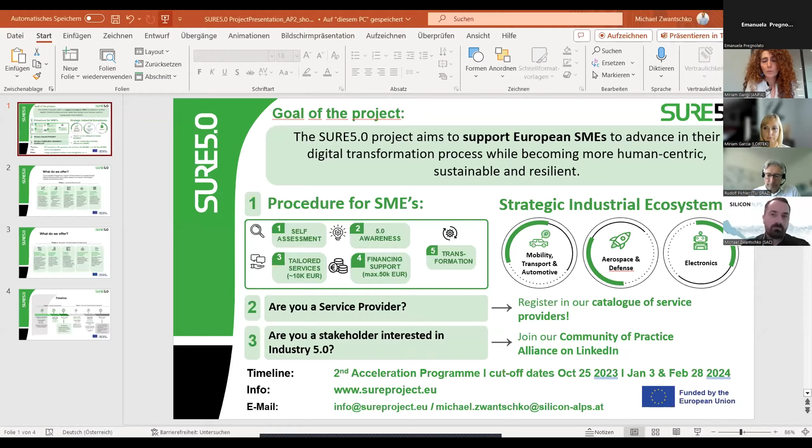Yes, good morning also from my side. My name is Michael Zwantschko from Silicon Alps cluster. We are a semiconductor and microelectronic cluster in the southern part of Austria, and we are part of the SURE consortium. I just want to give you a brief introduction about our project.

SURE 5.0, the goal of the project is to support European SMEs in their digital transformation process to become more human-centric, sustainable, and resilient. The overall topic is Industry 5.0, which is a topic strongly pushed also by the European Union, and it aims to introduce the topics of human centricity, sustainability, and resilience in manufacturing processes.

So how you can participate and what is the goal of the project and what are your benefits of it. First of all, European manufacturing SMEs active in those three strategic industrial ecosystems are able to participate in the project. If you are an SME working in those three sectors, mobility, transport, automotive, or aerospace and defense, or electronics, then you have the chance to be part of the project.

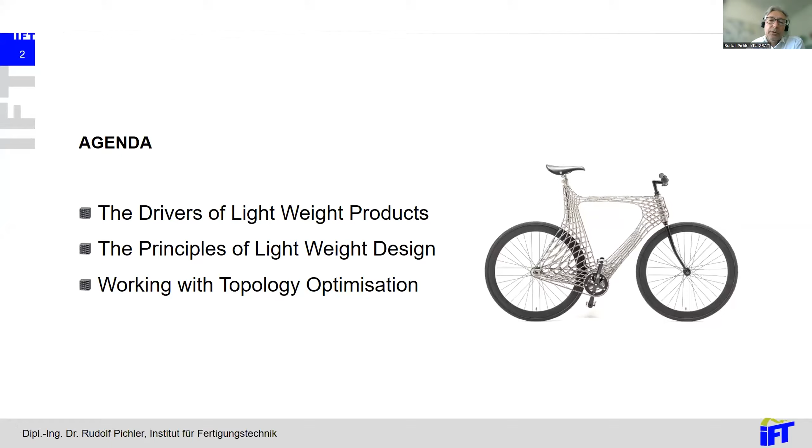Simply said, what are the drivers of lightweight products? It should be quite evident and simple. Then I will talk about the principles of lightweight design. And last but not least, I will go in a short way into the so-called topology optimization. This is a way how we can easily come to such products or such designs. If there are important questions, you're invited to interrupt me immediately, and I will try to give you a good answer.

As a first slide, I want to give you an introduction, and it's quite evident, I think 3D printing is definitely a future issue, yes. Lightweight design is driven by various branches, and it's not really a surprise that it's driven. If we look at the development going even up to 2026, as we got from the 3D printing trend report 2022, we see a rocketing development of these activities, and this is not only metal 3D printing, it's of course plastic, ceramics, other materials - nearly all materials that are actually used for doing 3D printing.

And the branches who are really the drivers, and who put a lot of money into it, are of course aerospace and also defense, military use, of course, once more the aircraft industry, also medical and dental industry, automotive industry, and many others.

Yes, and why is this a fact? It's no surprise. If we have products and components with less weight in comparison to former products, we have less fuel consumption, less environmental pollution, and what is also very important, we have less running costs.

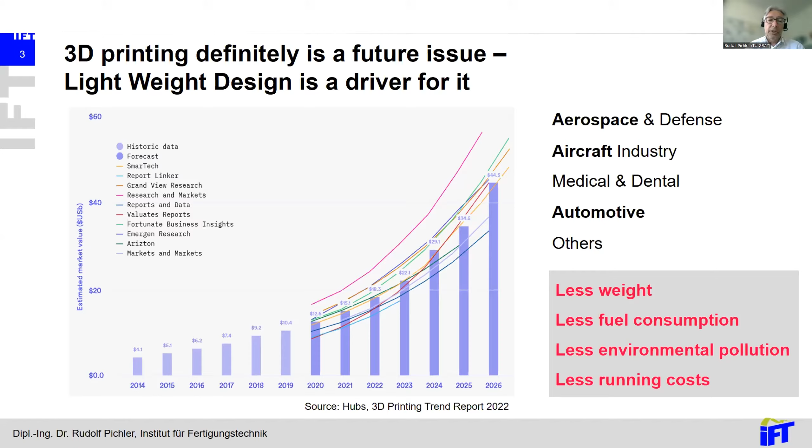So 3D printing has a lot of advantages, and it simply means we can design products that in former days were not possible. Nowadays, products with lightweight design can even be producible.

I'll give you a simple example. If we've got a hydraulic block, for years and decades it has been made and produced like this. In a hydraulic block you need to create channels—you have the feeds in and the feeds out, and it wasn't producible in a different way than this. You have a lot of material you don't really need, but it's very expensive to chip it off as well. So the final stage of this product was still like a cheese-looking part, and it was a heavy part.

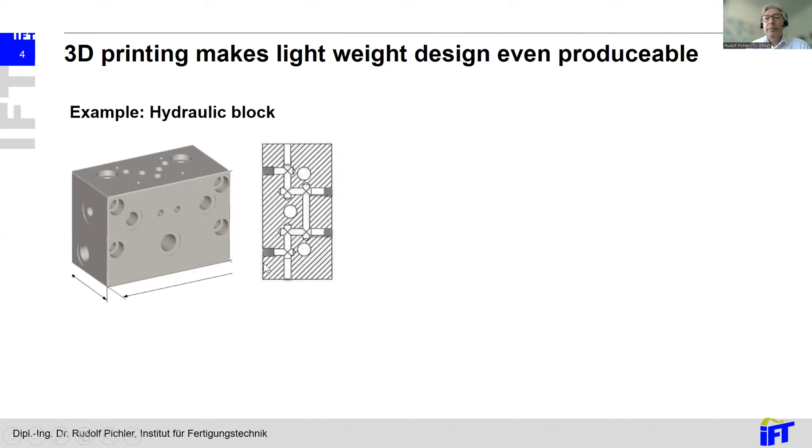With the means of additive manufacturing, it's now possible to have the same part with the same function in a quite different way. You can do it on the downside like this—you still have a frame maybe for stiffness, but you already have hollow sections that can be produced, cut out very easily. Or even in a better form, you end up with this design. Compare: in former days it looked like this, and nowadays it's possible to reduce the product to its very functions. In this case, we can have a good balance showing weight reduction of 80%. This is quite a lot.

Not only is lightweight an advantage, but the way of streaming fluids through these channels with rectangular bows and bends causes pressure losses. If we design it with a more streamlined design, we can reduce the pressure losses by 50% as well. Other benefits can also be created—you could apply cooling fins, special interfaces for sensors, and much more. So the advantage is really very high.

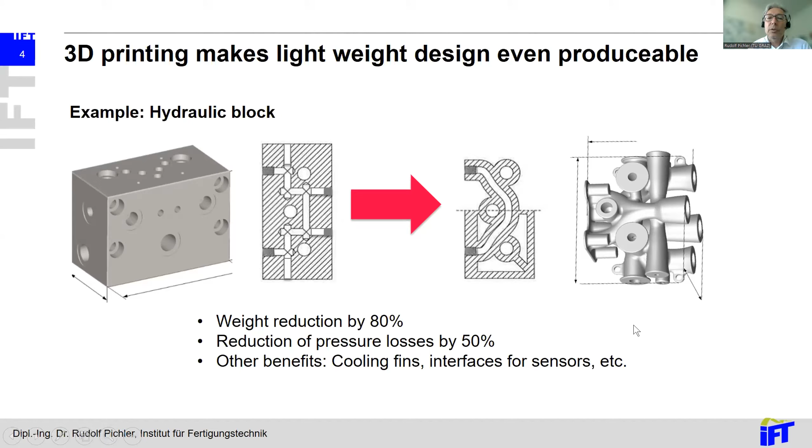The steady question is—here's another example from the aircraft industry. This is a bracket from former days with a weight of 918 grams. With additive manufacturing design and the technology to manufacture it, you can come down by, in this case, 64%. This is also quite a lot.

The question coming up, of course, is: wonderful, from the former design, the blue column, we could come down in weight by two thirds, like you can see in the numbers here. But what about the mechanical properties? This is quite an issue. But here too, if it's made really carefully, you can keep up the necessary stiffness, even maximum bolt force. For this case, the stress is a little bit lower than half. But you can optimize, and maybe you don't come down with weight as much, but you get some advantages in the maximum stress if you need it.

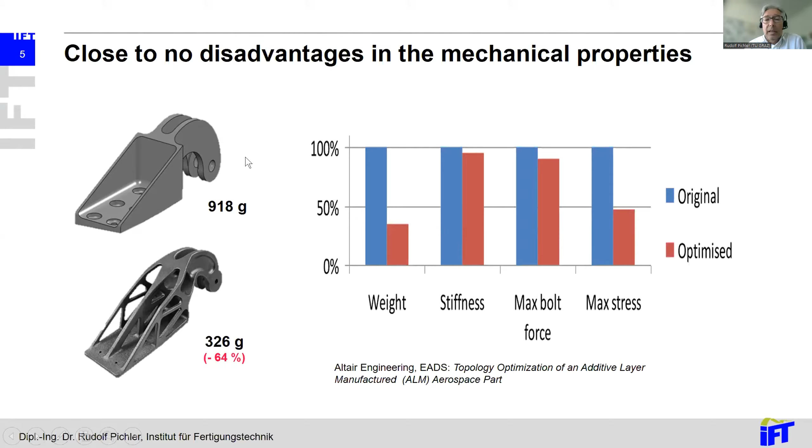Overall, you can say that with a really good design—and we will come to topology optimization later on—you can optimize and create the necessary stiffness or mechanical properties, as you had in the former design. So there is no excuse not to use and work with additive manufacturing for creating lightweight design.

I'll point out some construction principles for doing lightweight design in the next slide, and these are only three. My first proposition, my suggestion, would be for the constructors, for the engineers: please forget the right angle. Why was the right angle so important in construction? Remember the hydraulic block—it's simply due to the machine tools we still have.

Nowadays, we've got even better machines with more opportunities and possibilities, but most machines are still built up like this. You can drive your tools only in the X, Y, Z direction, and this leads to rectangular constructions. But for a new product, it's possible to leave the right angle, and you really could do what you like. This is my special suggestion.

Please draw the things like you want. We call this additive thinking. Additive thinking is losing the thinking of right angles, do it as you need it and not more. Put and use material only where you use it.

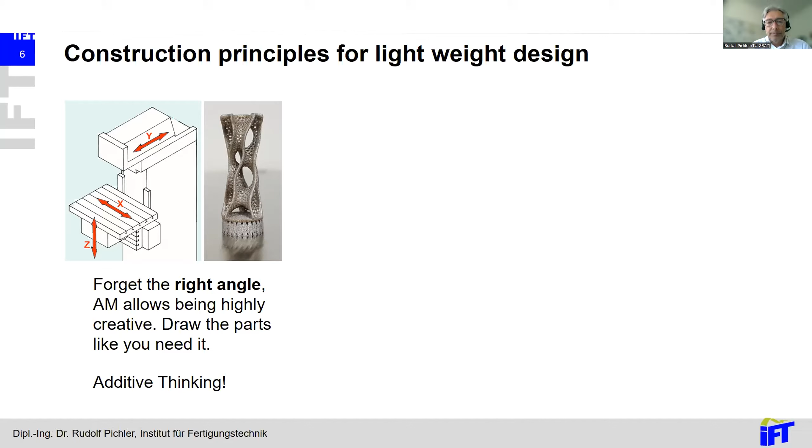So the next example is how to come to lightweight design. Mostly you work with full material, but full material doesn't have a need for the part in every area, because the flow of forces does not need, maybe, some inner metal work and build up. With additive manufacturing, it's now possible to work with so-called mesh structures.

As you can see here, this is a lever, and this is the side part of the seat of an airplane. With mesh structures, you get the necessary stiffness, and by using the air and the holes in it, you come down with weight.

Now one hint: don't fear that you have to construct these single connections. This is not necessary. When you work with software, you have tools that propose different forms of meshes. You just mark the outer borders, for example, and then press the button with the command to fill out with a certain mesh, type A, type B, type C. This is already a wonderful add-on tool in the software.

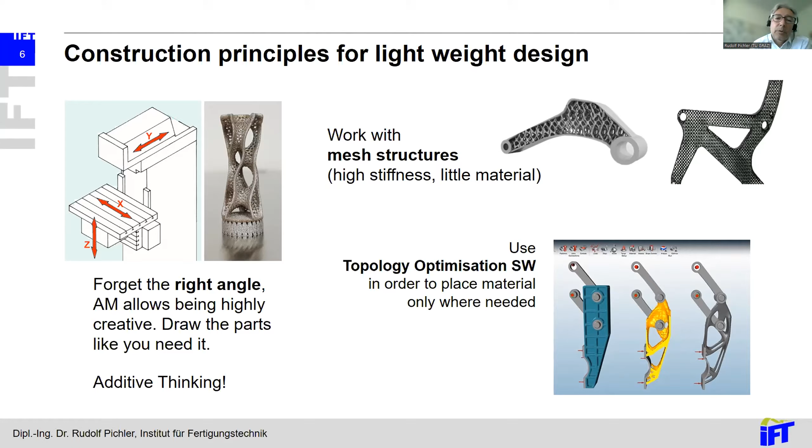So last but not least, it's only three. Of course in real life there are much more possibilities, but I want to keep it simple and give you an overview. What I suggest for coming to lightweight design is to use topology optimization, and of course you have to work with software. This is a first example and draft. What is the original part and what is the end part? I will show you, since I assume you are not acquainted with topology optimization so far. I'll give you a brief example.

Oh, there's one more example supporting the idea with mesh structures, really to come down with weight tremendously. This is a motor block with 5.1 kilograms.

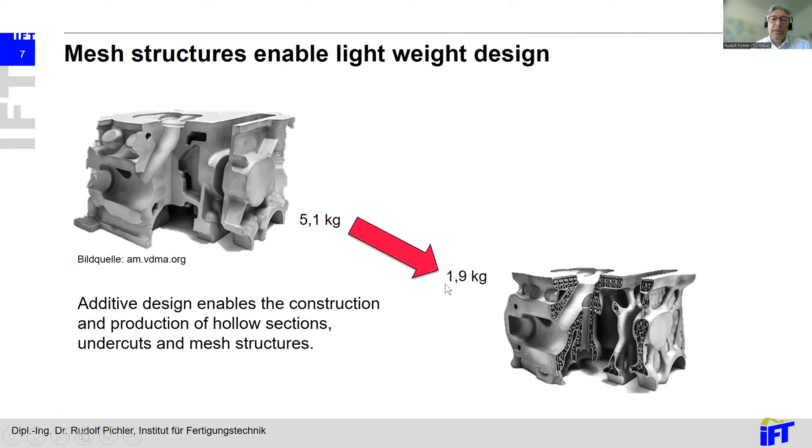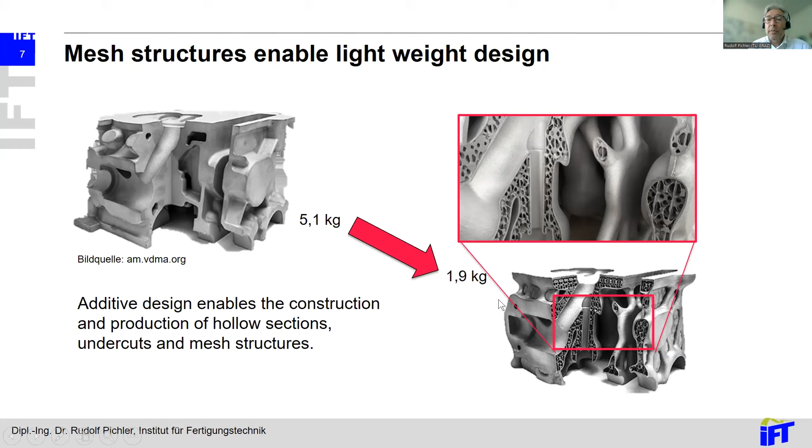And as we remember, additive manufacturing and additive design allow the construction engineer to work with hollow sections, undercuts, and mesh structures. The result for this motor block is you come down even to 1.9 kilograms, and this is due to, if I go inside and show a detail, the mesh structures, where in former times there was full material. This is a tremendous step down, and the mechanical properties, stiffness and strength, must of course be the same, otherwise this part would be useless.

So now I want to give you a short introduction to how topology optimization works. Let's create a model bridge, not a bridge for real life, because the dimensions would be too high, but maybe for your playground or your small play trains. Let's build a small bridge with a dimension not longer than 10 centimeters, as an example.

What is the first step? For this, of course, you use topology optimization. You cannot do it manually. Then you set, this is the blue dotted line here, the 3D design area. In X, Y, Z, you say the maximum extent this bridge could have is dimension A, B, C, or X, Y, Z. Here I only have a 2D design and a sketch.

The next thing is, yeah, more or less we have to build a bridge. I simply set a bar just to know where these forces fly around. You do not really draw this bar, but only at some position within this blue frame, you put the reaction forces. As we know, with a bridge we have a fixed support, like here in two dimensions, even three dimensions. Of course you have a second support force, and you also have torques to regard.

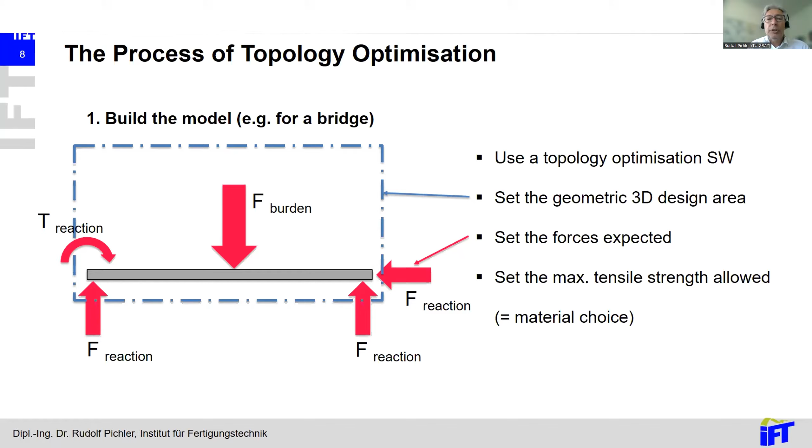And depending on the material choice, you have to obtain a maximum of forces. So this is the beginning, and then simply said, you press the button in this software, and there's a calculation done. There's a lot of equations, thousands of equations, and then there's an optimization done.

And the output will be, please look at item 2 here, you get a first draft out of the program. And this draft looks like this. It's a little bit crazy and strange, because sometimes you have interruptions, there's no material. But this is the consequence and the result out of the calculations.

And then the engineer comes back again and does some adaptations, and he or she can reinforce the dimensions of the principal geometries. The most important output of such a topology optimization is the allocation of where forces sooner or later should flow.

So you develop from this here, not even being producible, to this here, and in a third step you're doing some smoothing, because what you can see here, there's a lot of notches, and it's not really smooth. And as we know, as mechanical engineers, this is the beginning of a crack and is not allowed. So with manual rework, and also with use of the tools of the software, you can smoothen this principal geometry.

The more you go into FEM calculations, before you really refine it, but this is more or less the result and the way, very roughly, how you come to a topology optimized part, in this case a bridge.

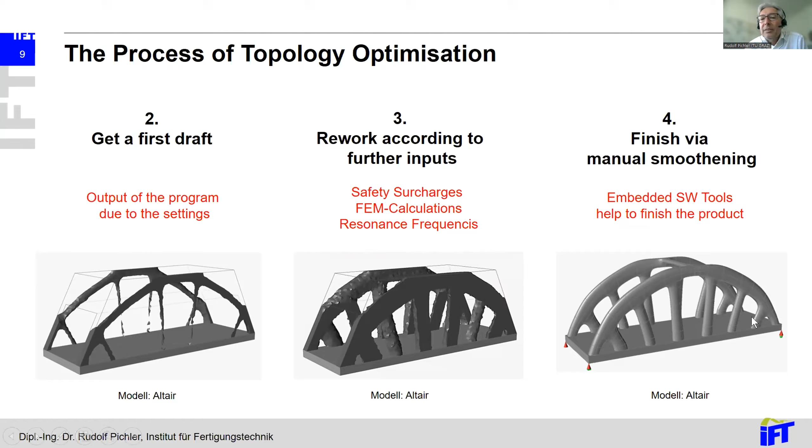I give you some examples from aerospace as well. In former times it was like this. There's a lot of metal sheets that were welded together. You created some stiffness via additional metal sheets, and you can think that this is quite heavy, and via topology optimization you end up in such a design.

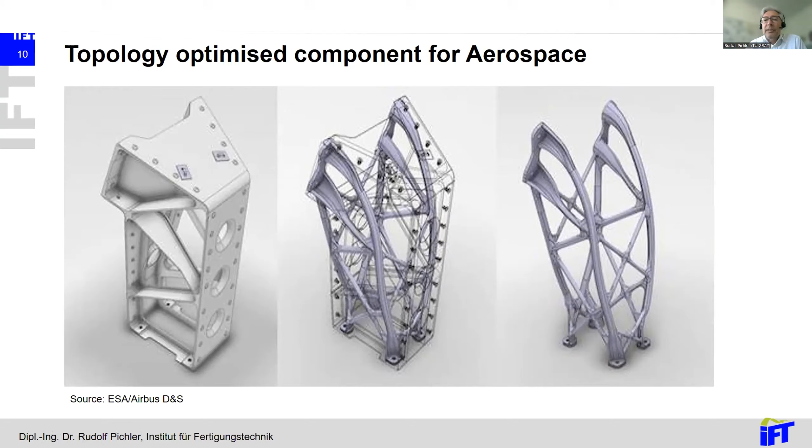It's quite wonderful, because all these designs are very close to what nature is doing. If you watch, for example, the structure of a leaf, you can find quite similar designs. So this is one example.

One more example, this is also what we did in our small factory. For example, gripper fingers for robots. You need any weight reduction, and you simply do it via topology optimization.

This also we did at our institute. It is part of a lightweight robot arm. In former times it was a simple tube, and this topology optimization, the result of this was this really. It's really design, it's very lovely.

Other examples you can find here, or here, a lightweight reduced console. I have to add, if you have these examples, console, or even maybe this tube, the technology of metal additive manufacturing and the periphery with the software you need and so on is quite costly.

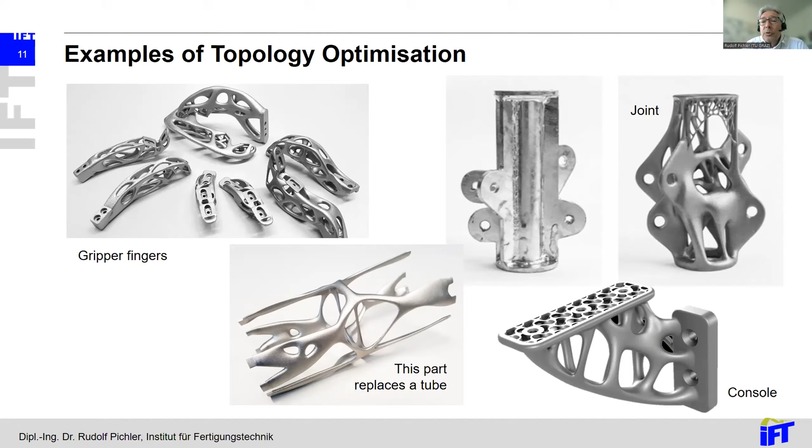You really have to consider this. But especially if lightweight can reduce your fuel consumption, or you get other advantages - I could talk hours now about this - then it makes it reasonable to go and use this technology. This is my statement here.

Okay, so the time is too short. I could talk a lot, but I want to summarize in the following. Additive manufacturing, or alias 3D printing, has got a high impact to come down in weight, and this actually in these times is a big contributor to the reduction of carbon dioxide.

The way for lightweight design has to leave conventional paths, in doing constructions. I can only repeat, and this is what I tell the people in the construction department: really, leave the right angle. Do it like you think that it is necessary.

Undercuts, no problem. Hollow sections, no problem. Work with meshes and so on. This is additive thinking. Topology optimization as a technique, and of course the use of relevant software, is a good way to reduce material in the most appropriate way. You're very effective to come to the most appropriate design.

Last but not least, additive manufacturing for metal components is not a low-cost technology. It doesn't make sense if I tell you the expenses I had, because you need a certain machine, and I would have to describe the whole application with its periphery. But overall, it's not a low-cost technology. Think about working with partners, maybe. There are a lot of machines already around.

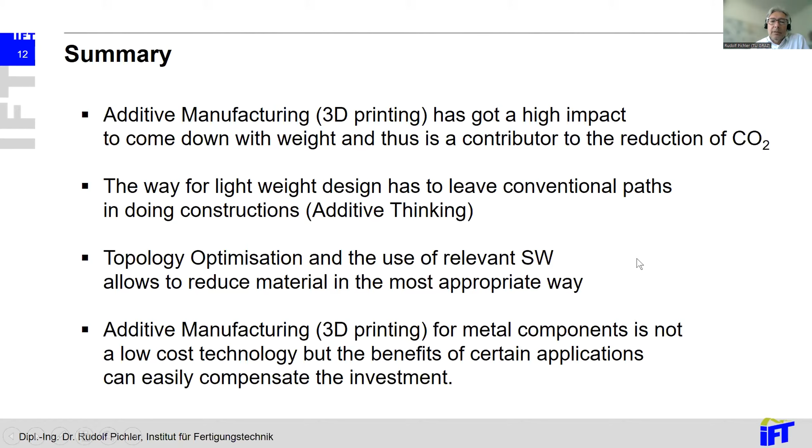Thank you, Dr. Pichler, for your interesting presentation, stressing some important concepts like additive thinking. I found it very interesting, and it confirmed the fact that 3D printing is really a groundbreaking technology that can revolutionize the manufacturing processes of SMEs, driving innovation, sustainability, and cost effectiveness within the industry. So, if there are some questions for Dr. Pichler, this is the moment to write them down in the chat, or even speak directly if you prefer. We have a few minutes for answering your questions.

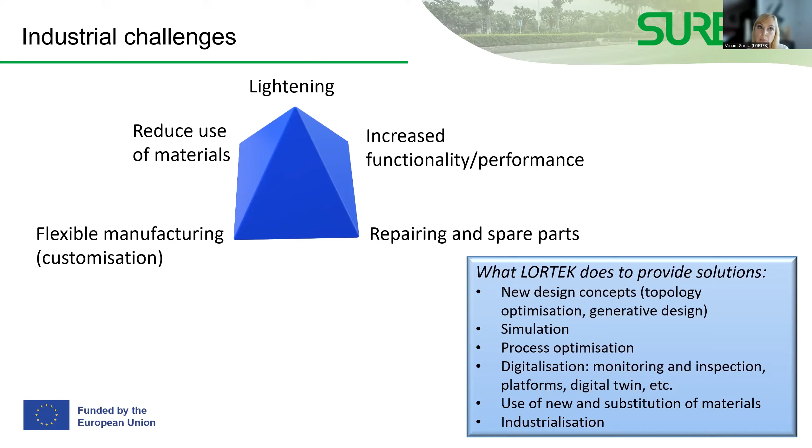In order to answer all these challenges, at Lortek we work with different technologies. We work on new design concepts in the sense that Rudolf explained in the previous presentation, working with topology optimization and generative design. Also working with simulation activities to ensure non-defectiveness of parts, with process optimization, digitalization, new materials, and industrialization of the technologies and processes. With all this in mind, I will show you 7 examples of real use cases we have carried out, all related to some of these challenges.

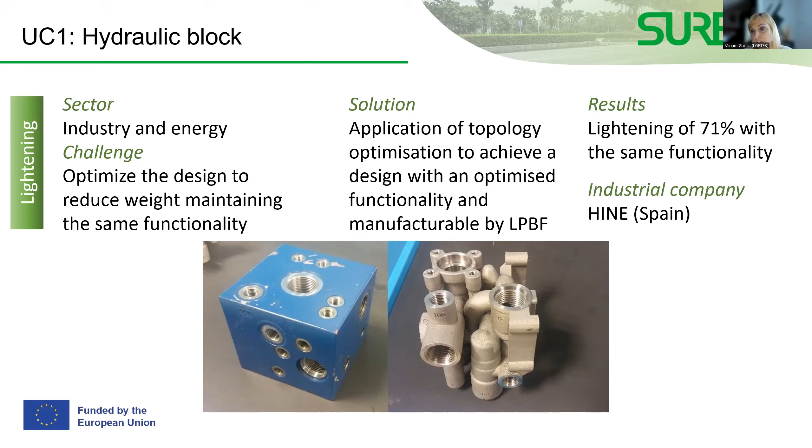The first one is actually very similar to what the previous presenter explained about the hydraulic block - this is the reality of the real use case of what he showed before. Here the aim was lightening, reducing the weight. These hydraulic blocks are used in industry and the energy sector. We worked with a Spanish SME called HINE, which wanted to optimize the design to reduce the weight but needed to keep the same functionality. So we worked on topology optimization to optimize this new design according to an optimized functionality and manufacturability by laser powder bed fusion. We obtained a 71% reduction of weight, very good results, keeping the same functionality, so the company was able to include this new product in their catalog.

The second use case is a flow control actuator for aeronautics. Here the aim was to increase functionality. Airbus had a very good design of this flow control actuator to improve the fluid flow of future engines for future aircraft, but they couldn't manufacture it by any means except additive manufacturing. They were looking for someone able to manufacture prototypes with these new designs, so we worked on simulation of the laser powder bed fusion process.

For example, the powder was stuck inside the internal channels, so we had to be very imaginative in order to create solutions to take out this powder before making the thermal treatments of the parts, to have full functionality. Airbus was very happy with the results.

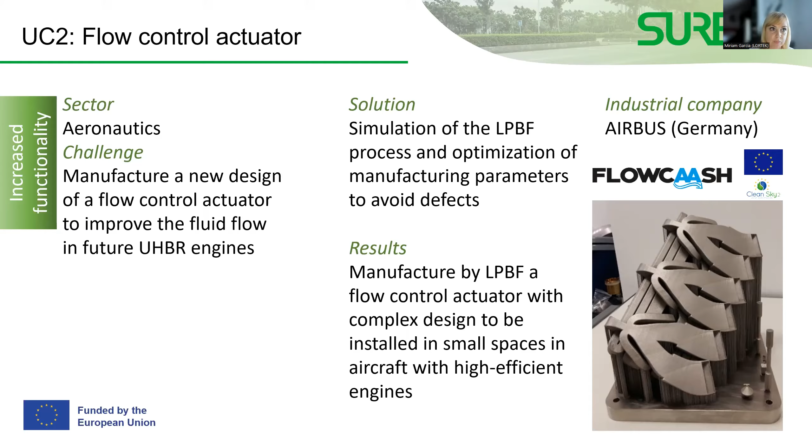Then we have another use case, a manual electric hydraulic tool. Alkar, a Spanish SME, was looking for lightening and increased performance of the part, so they wanted to change the design to reduce the weight and improve the usability of the head of the tool.

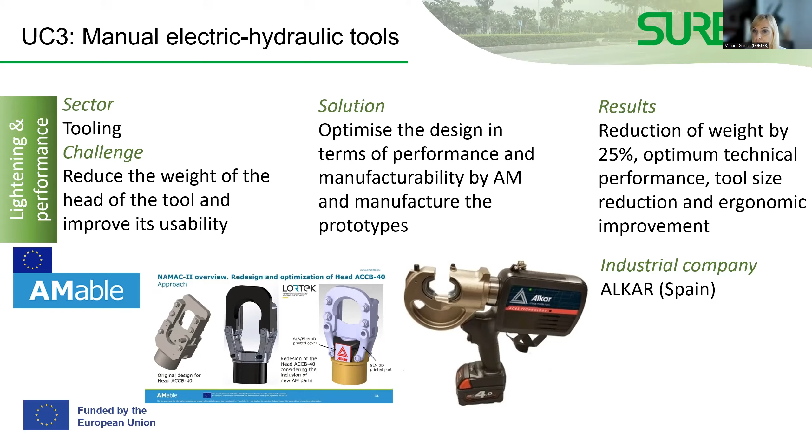We obtained a reduction of the weight of 25% with very good technical performance. We were able to reduce the size of the tool, and ergonomy was improved for the users. Alkar has included this new product in their product portfolio.

The fourth use case is a sealing ring, used in aeronautics, and here the aim is to substitute toxic materials. Liebherr wanted to substitute the cobalt alloys currently used in these sealing rings, which have health potential issues in the cabin air and might be toxic for pilots, so they wanted to substitute these cobalt alloys with other materials.

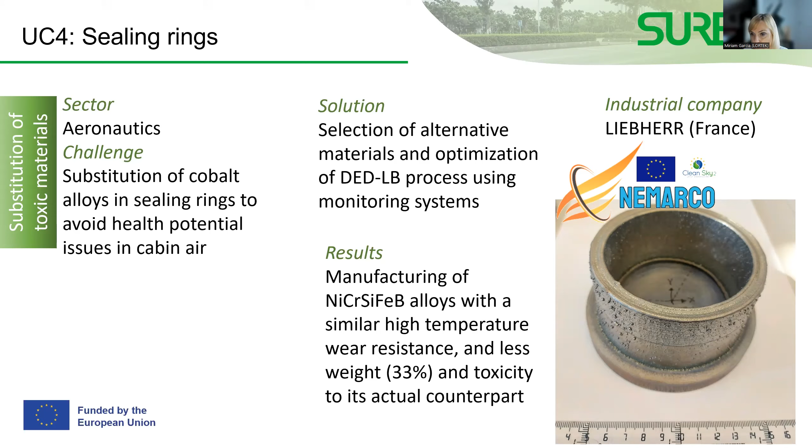They were lighter as well, and had less toxicity than the cobalt sealing rings. Liebherr has found a very good solution, and they are going to continue working in this sense to try to produce this at higher TRLs.

The next use case is a heat exchanger for aeronautics. Here the aim is to increase the performance. Safran was the company behind this, and they wanted to improve the aerothermal properties of the heat exchangers by reducing the wall thickness of the fins, which would bring a major improvement in aerothermal performance.

So we developed different manufacturing strategies for laser powder fusion to reduce this wall thickness in two materials, Inconel 718 and an aluminum alloy. The results were really amazing because we were able to reduce the thickness below the state of the art, manufacturing wall fins with thickness below 0.2 millimeters for both materials. It's a really good result because they are really thin.

With this, we then manufactured real scale heat exchangers. We tested them, we also simulated them, and found the aerothermal performance was increased above 15% while keeping the same mechanical properties.

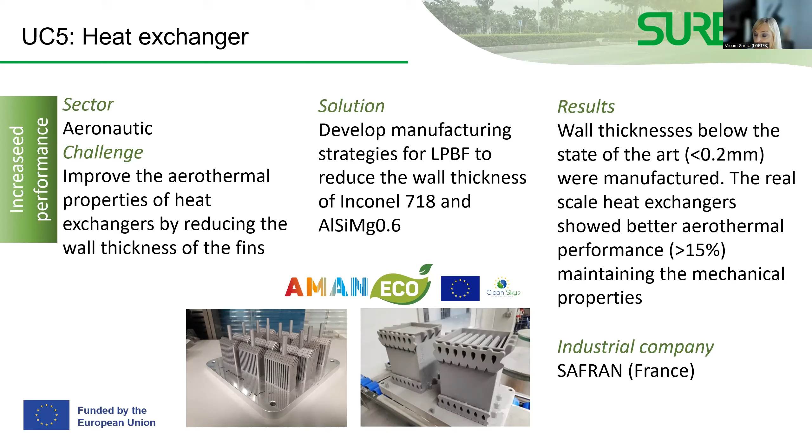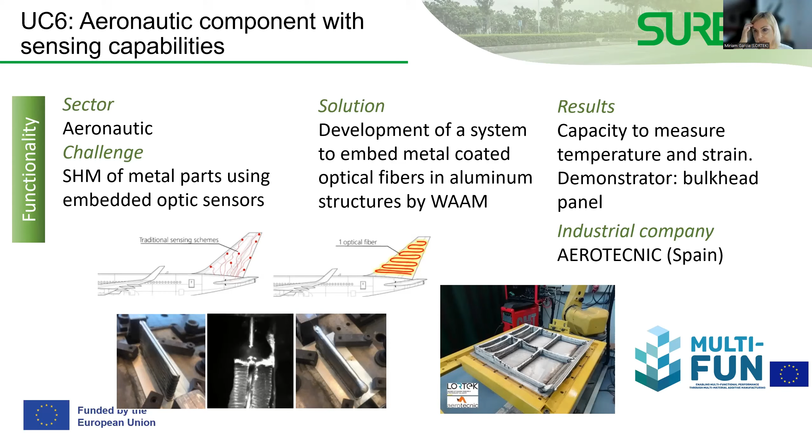We made a demonstrator, this bulkhead panel you can see. Maybe it's not too appealing, and obviously we had to continue working on this, but it's a way to demonstrate for Aerotecnic that it's possible to manufacture and obtain parts with sensors inside the metal that can be used for structural health monitoring - a step forward for these new aircraft.

And the last use case is to show you how additive manufacturing can be applied on wind farm components.

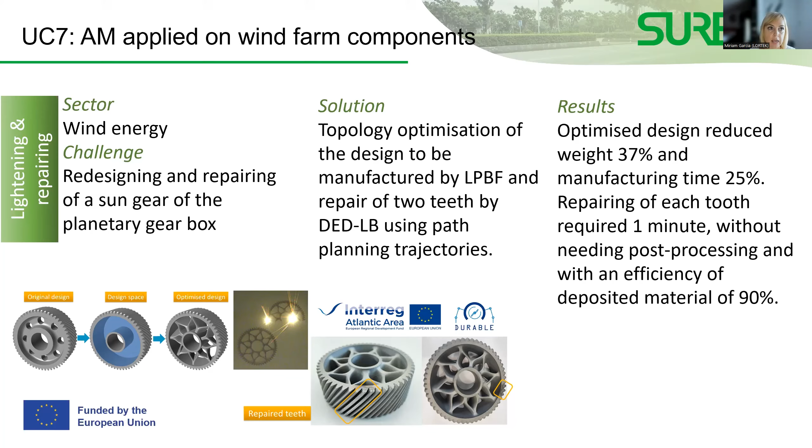With all these use cases, what I wanted to let you know is that additive manufacturing can do a lot for SMEs. At production level, additive manufacturing is able to produce prototypes of new products, customize small batches, reduce lead times, reduce waste, enable complex geometries, help you on demand manufacturing, and even help you on producing rapid tooling that can be set up in traditional manufacturing, just for jigs, fixtures, tools, and so on.

And all these benefits at the production level can be translated to the business level, because additive manufacturing can help you in differentiating from competing products, because it enables better performance, lighter weight, and so on. Also a market advantage, because you can make new products or quicker manufacturing, as you have seen in some of the examples.

You can also reach new customers because we are offering innovative products, as some of the SMEs I mentioned did, including new products in their catalogs for new customers, access to niche markets, and meeting specific customer demands — and even cost savings in two ways: because it produces less waste and needs less material, but also because it results in reduction of storage costs.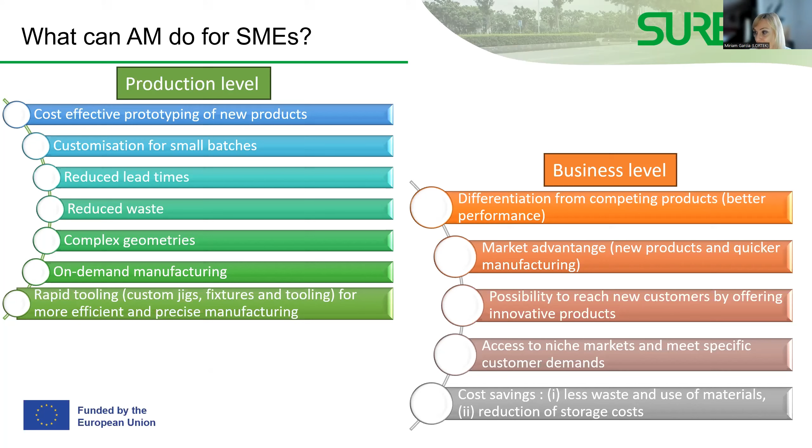So now I hope that you can think of new projects dealing with additive manufacturing, and in this regard, the SURE5.0 project can help you a lot. And just to finalize, I want to mention that we are part of the service providers of the project. We are offering different services, specifically service 2 and 6, which are focused on additive manufacturing.